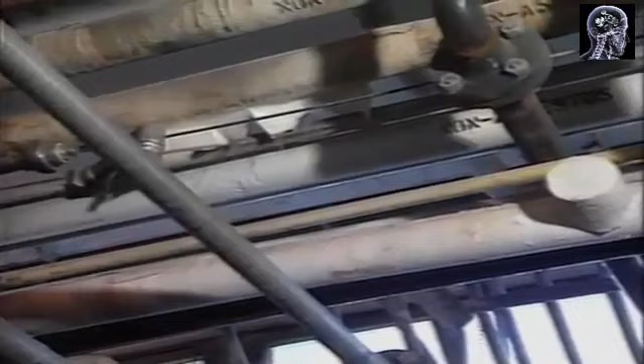Water hammer that results from localized abrupt pressure drops may never be heard, yet water hammer can acquire great force, damaging equipment, ruining product, and potentially putting personnel at risk.

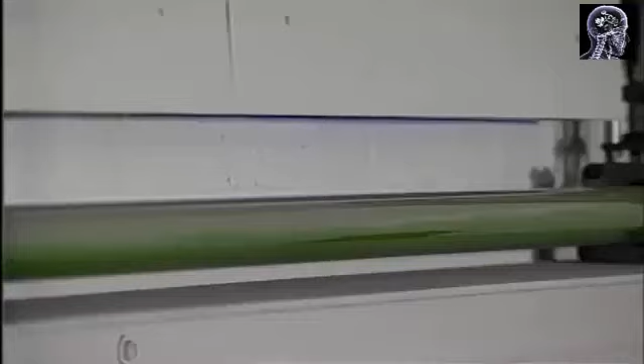Water hammer begins when some force accelerates a column of water along an enclosed path. The incompressible nature of water gives it the power of a steel sledge as it slams into elbows, T's, and valves. The resulting vibrations are transmitted along the water column and piping, damaging fittings and equipment far removed from the problem source.

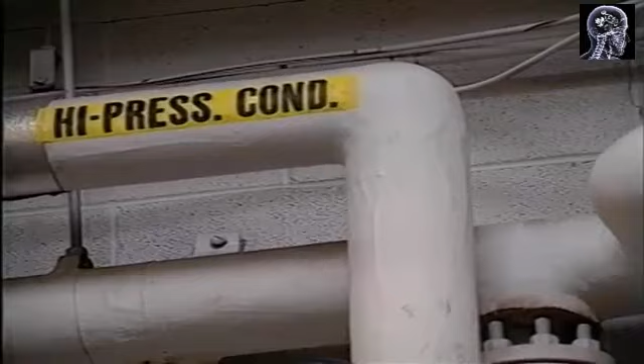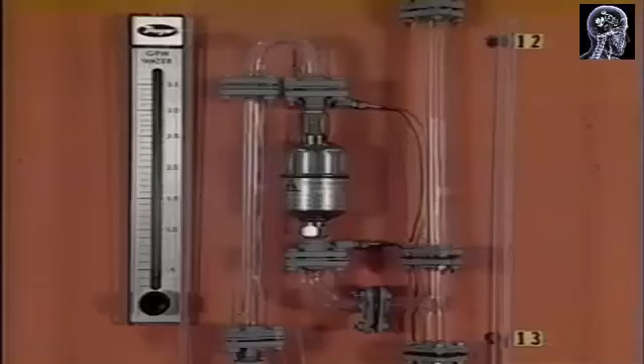Water hammer can occur in any water supply line, hot or cold, and its effects can be even more pronounced in biphase systems. Biphase systems contain both condensate and live or flash steam in the same space. Heat exchangers, tracer lines, steam mains, condensate return lines, and in some cases pump discharge lines may contain a biphase mix. Three distinct conditions have been identified which provide the force that initiates water hammer.

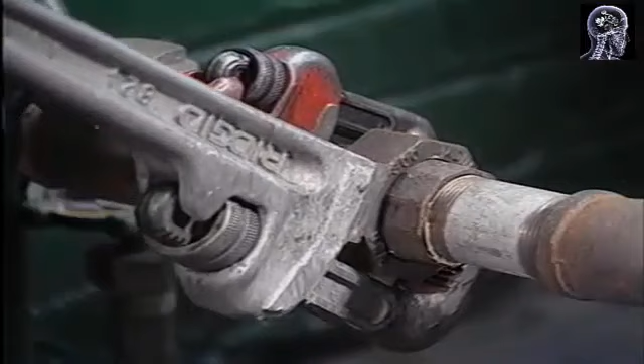These conditions, hydraulic shock, thermal shock, and differential shock, are common to many industrial fluid applications. However, following a few simple guidelines will help you minimize the occurrence of these shocks and diminish the chance of damaging water hammer.

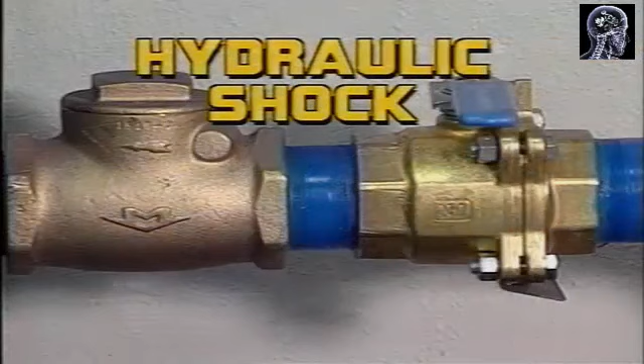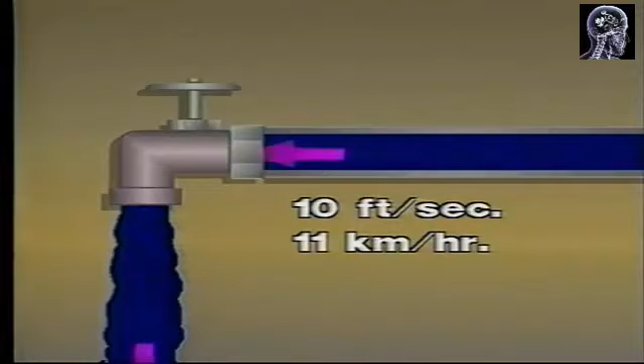Hydraulic shock occurs when a valve is closed too abruptly. When a water valve is open, a solid column of water moves from its source at the main to the valve outlet. This could be 100 pounds of water flowing at 10 feet per second, or about 7 miles per hour. Closing the valve suddenly is like trying to instantly stop a 100-pound hammer.

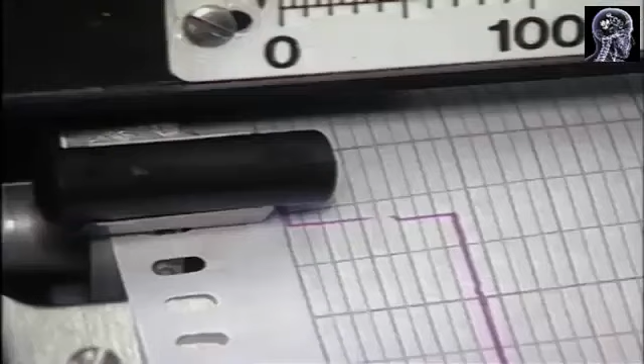A shock wave of about 600 psi slams into the valve and rebounds in all directions, expanding the piping and reflecting back and forth along the length of the system until its momentum is dissipated. By closing the valve slowly, the velocity of the water is reduced before the column is stopped. Since the momentum of the water is decreased gradually, damaging water hammer will not be produced.

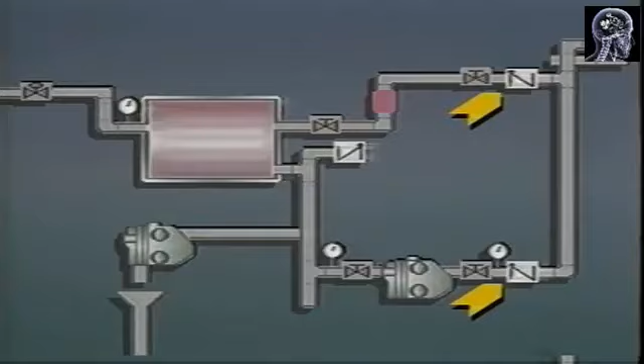Sometimes check valves can produce hydraulic shock. Swing check valves are often used to prevent liquid being drawn into spaces that are subject to intermittent vacuums. They are also applied to prevent backflow from elevated systems when adequate pressure to raise the liquid cannot be guaranteed. In either case, the acceleration of the reversing column of liquid may be quite high. If the swing length of the check valve is sufficient, the column will build enough inertia to cause hydraulic shock in the time it takes the valve to slam shut.

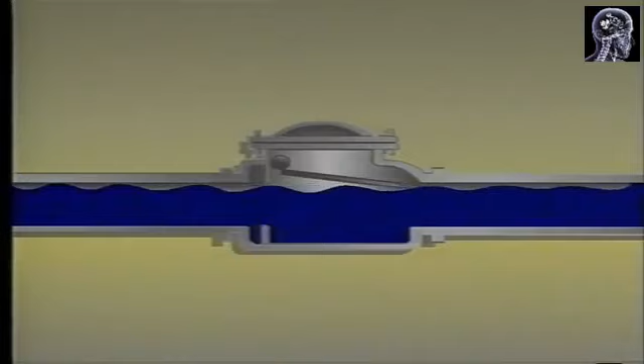Substitute silent or non-slam check valves for swing checks to prevent water hammer in these situations. Silent check valves are center-guided to provide a much shorter stroke than swing checks. These valves also use a spring to help in closing. The result is that silent check valves are closed by the loss of upstream pressure rather than the reversal of flow, preventing hydraulic shock.

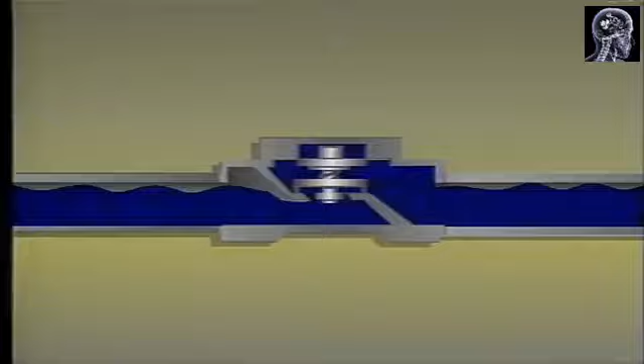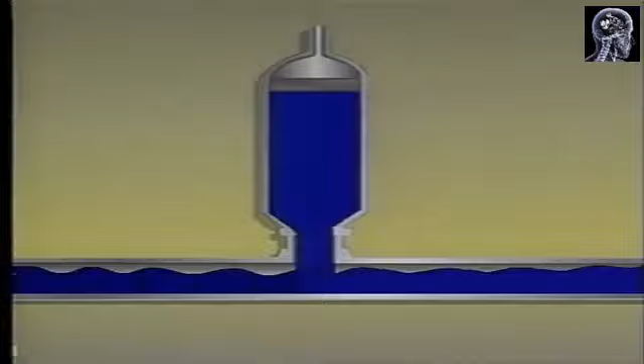Water hammer arresters, if correctly sized, placed, and maintained, will reduce water hammer. When the forward motion of the water column is stopped by the valve, part of the reversing column is forced into the water hammer arrestor. The water chamber of the arrestor expands at a rate controlled by the pressure chamber, gradually slowing the column and preventing hydraulic shock. To prevent water hammer due to hydraulic shock, avoid suddenly stopping water columns.

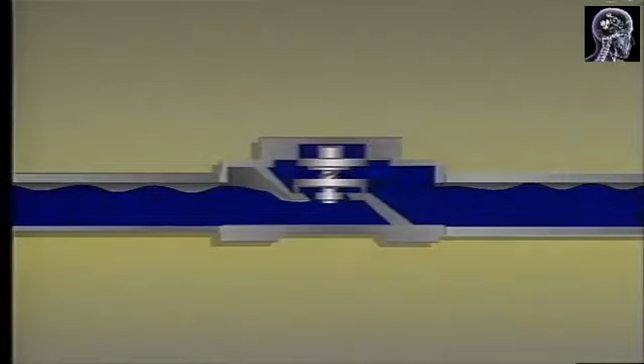Ensure slow closure of valves and install spring-loaded, center-guided, non-slam, or silent check valves that close before flow reversal when appropriate. Use water hammer arresters if necessary, but be sure they are sized and placed correctly and are well maintained.

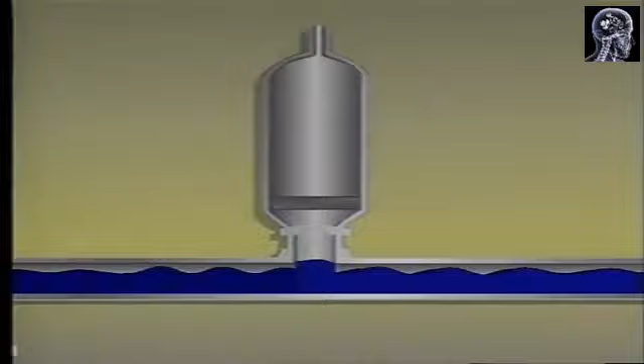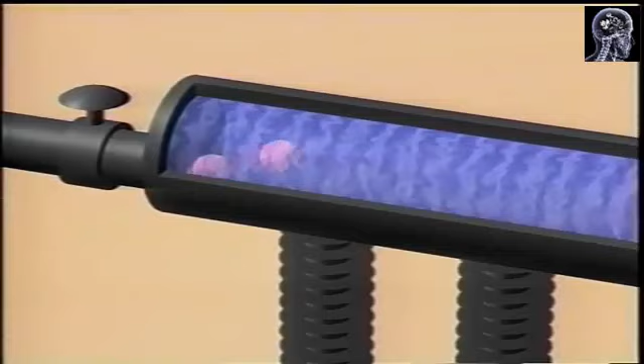Water hammer may also be initiated by thermal shock. In biphase systems, steam bubbles may become trapped in pools of condensate. Since the condensate temperature is usually below saturation, the steam will immediately collapse. Steam occupies hundreds of times the volume of an equal amount of water.

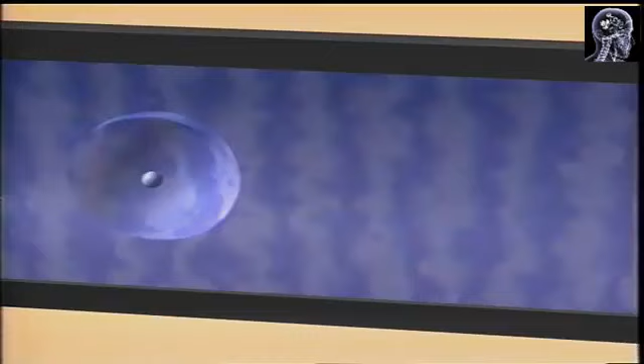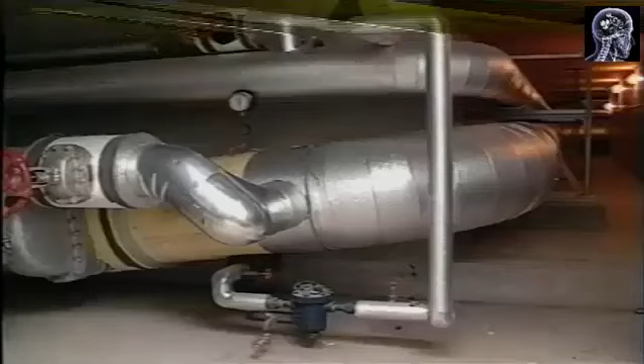When the steam collapses, water is accelerated into the resulting vacuum from all directions. When the void is filled, the water impacts at the center, sending shock waves in all directions. One likely place for thermal shock to occur is in steam utility corridors.

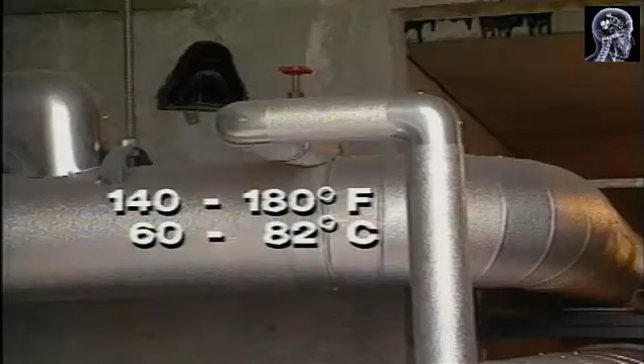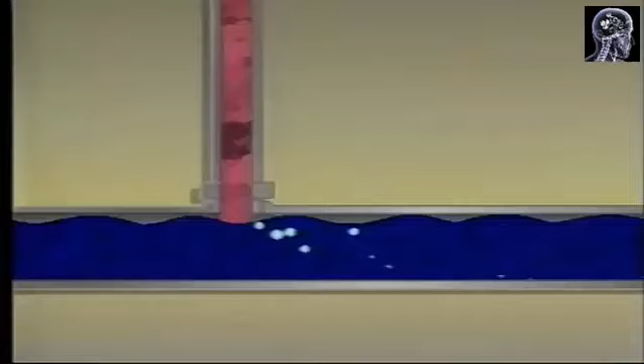In these areas, the drip traps from high-pressure steam mains often discharge directly into the pumped condensate return lines. The temperature of the condensate in these lines usually ranges from 140 to 180 degrees Fahrenheit. The condensate being discharged from the steam trap is at nearly steam temperature when it passes through the trap orifice. When the trap discharge enters the low-pressure condensate line, a great deal of it flashes back into steam.

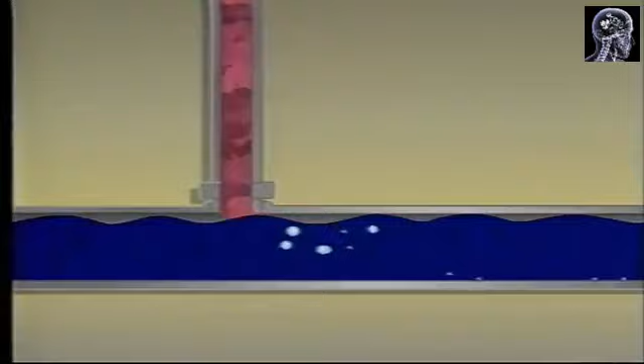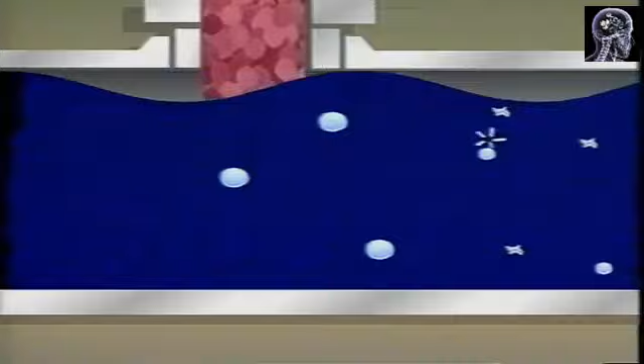The flash steam immediately collapses again when it encounters the relatively cool pump discharge water. This thermal shock often causes damaging water hammer. The localized sudden reduction in pressure near the wall chips away piping and tube interiors. Oxide layers that otherwise would resist further corrosion are removed, resulting in accelerated deterioration of piping and equipment.

To minimize such a disturbance, the drip trap should discharge in the direction of condensate flow by means of a special fitting. This method of controlling thermal shock, called sparging, reduces the concentration of collapsing steam bubbles and keeps the action from occurring by the pipe wall.

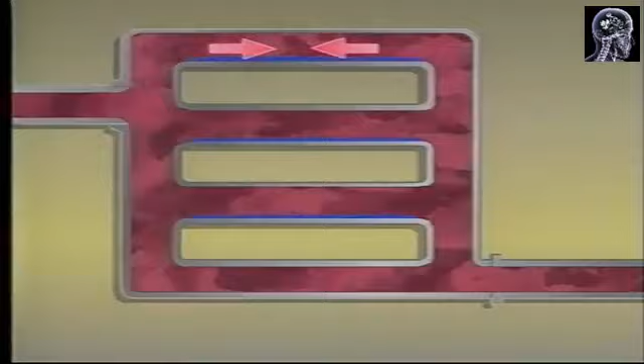Thermal shock can also occur easily in steam coils if they are constructed as shown here. Since the steam is directed toward the center tube first, it can reach the return header before the top and bottom tubes are filled. Consequently, steam feeds the more remote tubes from both ends. With steam flowing into both ends of a tube, waves of condensate flow toward each other. These waves have the potential of trapping pockets of steam between them. If this happens, thermal shock will result when the pocket of steam collapses, and water hammer will probably occur.

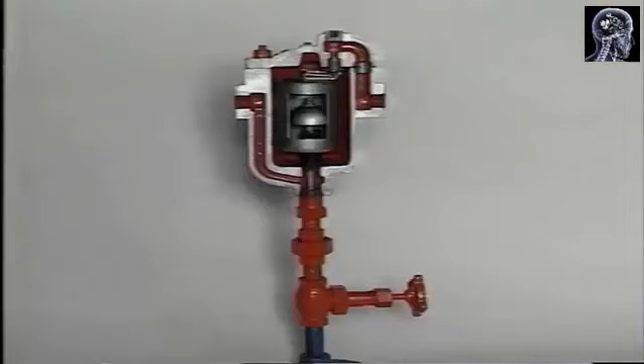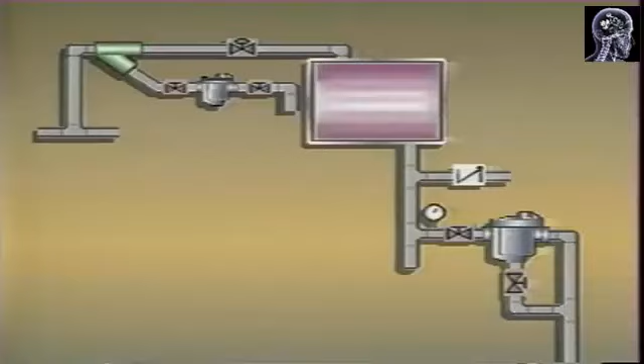Prevent the thermal shock that is generated by such a design by substituting a constant purge device, such as a differential condensate controller, for the steam trap. Condensate controllers maintain a positive differential pressure across the coil at all times. All the tubes will be fed from the supply end only, preventing the entrapment of steam and the resulting thermal shock.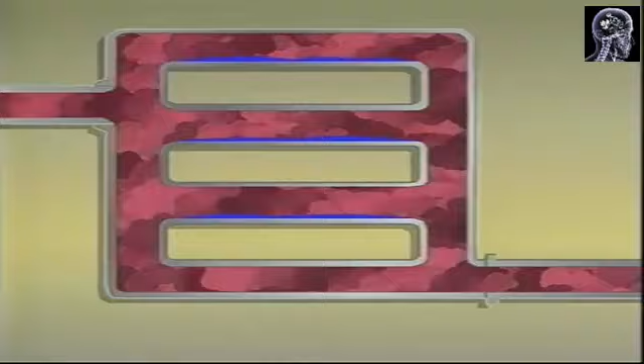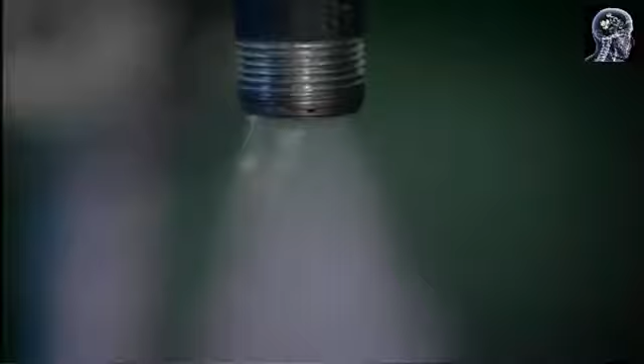Malfunctioning steam traps may also contribute to thermal shock, followed by water hammer. A steam trap that has failed open injects live steam directly into the condensate return line. If this steam is mixed with return line condensate of sufficiently low temperature, it will immediately collapse, and thermal shock will follow. To prevent the occurrence of water hammer due to thermal shock, you must reduce the concentration of collapsing steam bubbles in the condensate.

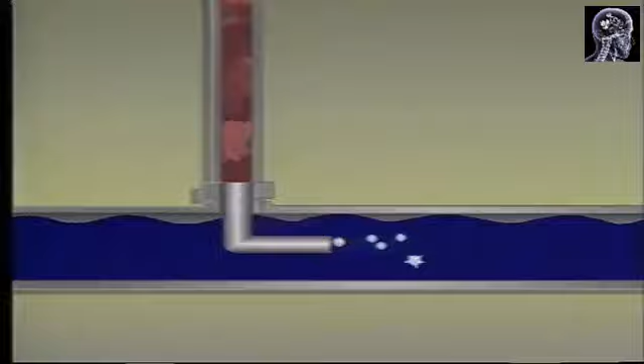If flashing condensate must be discharged into a cool condensate line, it should be discharged in the direction of condensate flow and away from the pipe wall. Precautions must be taken that heat exchanger tubes are always filled from the supply end only.

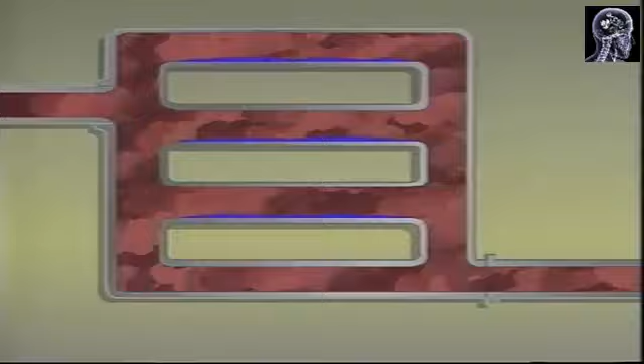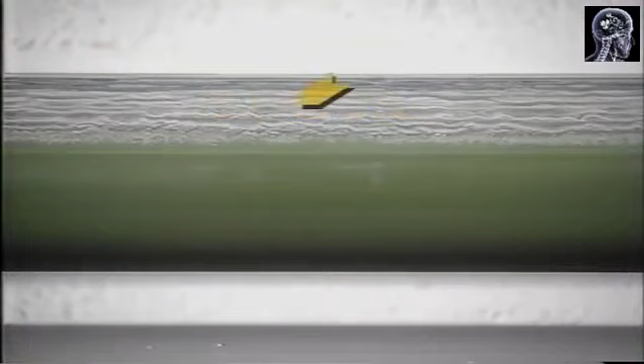Differential shock, like thermal shock, occurs in biphase systems. Differential shock can occur whenever steam and condensate flow in the same line, but at different velocities, such as in high-pressure condensate return lines. In biphase systems, the velocity of the steam is often 10 times the velocity of the liquid. If this gas flow causes condensate waves to rise and fill the pipe, a seal is formed with the pressure of the steam behind it.

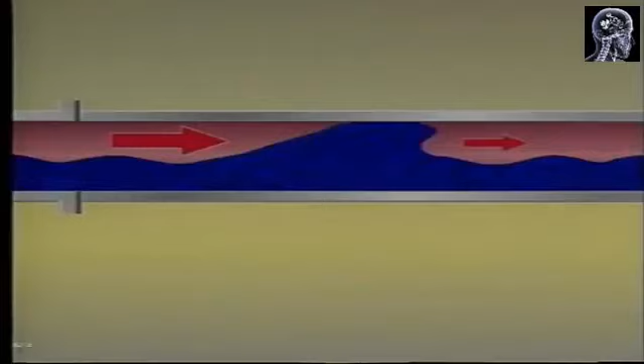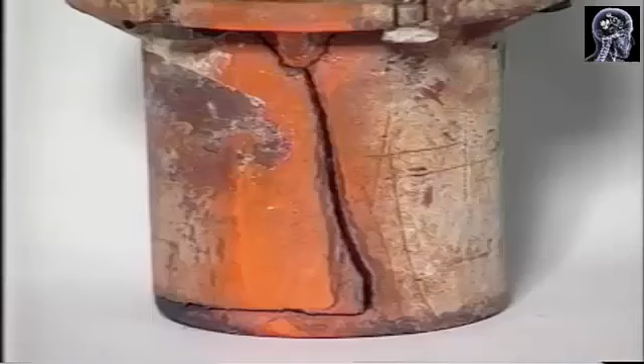Since the steam cannot flow through the condensate seal, pressure drops on the downstream side. The condensate seal now becomes a piston that is accelerated downstream by virtue of this pressure differential. As it is driven downstream, the piston picks up more liquid that is added to the existing mass of the slug and velocity increases. This is differential shock. If the slug gains high enough momentum and is then required to change direction at a T or elbow, or is stopped by a valve, great damage can be done.

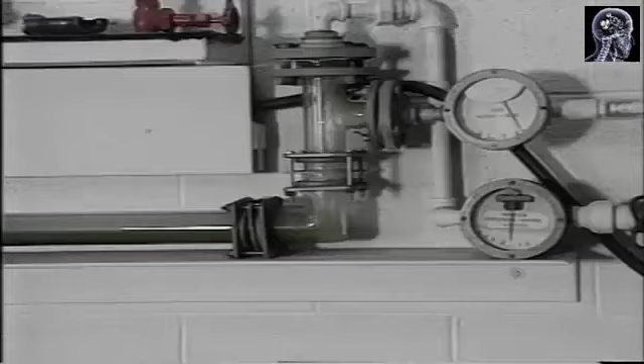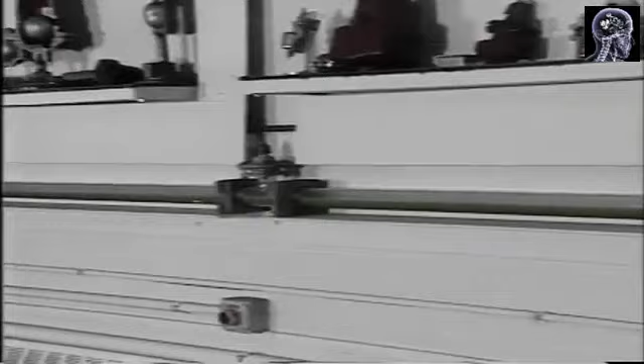In the demo lab at Armstrong International, we have assembled a fixture to illustrate the problem. We use this 20-foot, 2-inch diameter glass pipe to act as a condensate return line. The pipe is pitched 1/4 inch in 10 feet to provide gravity flow. Flowing through the pipe, we have cold water. In addition to water, we can also have compressed air flowing in the system to simulate flash steam flowing across the top of the condensate by virtue of differential pressure.

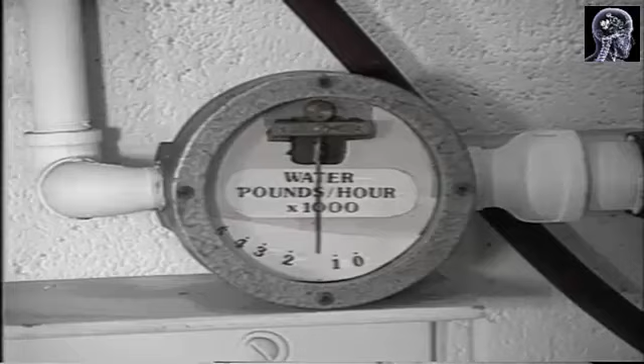One flow meter constantly measures the flow rate of the water. Another flow meter continuously monitors the flow rate of the compressed air. As you can see, we now have 1,500 pounds per hour of water flowing in our glass pipe, and no compressed air.

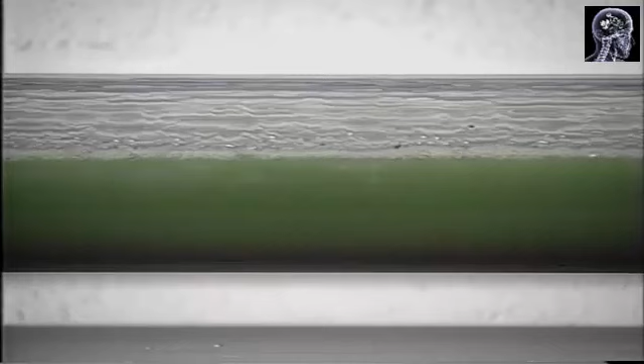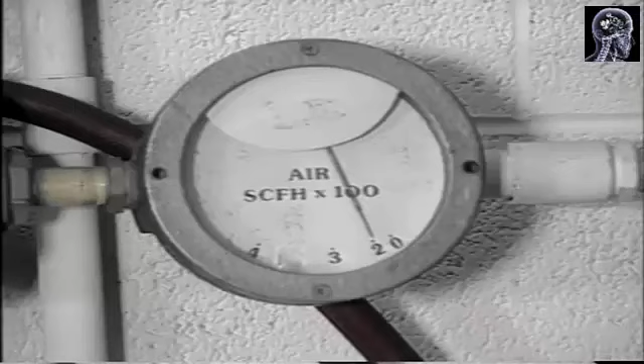Under this condition, our pipe is approximately half filled with water. As we increase the flow rate of water in our pipe to 2,000 pounds per hour, the depth of the water increases to 5/8. We now introduce compressed air into the system to simulate flash steam, with a flow rate of about 200 standard cubic feet per hour, and the depth of the water recedes.

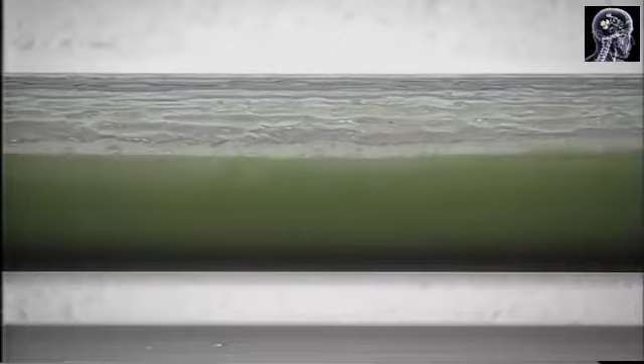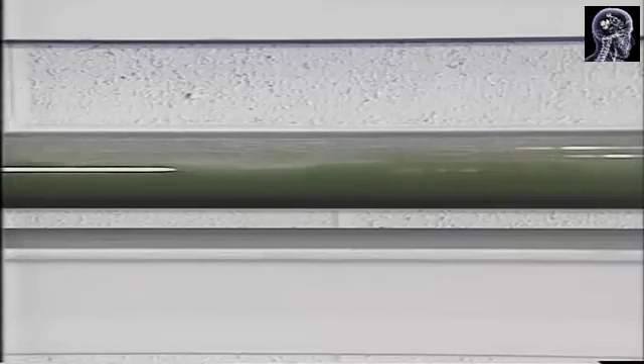We are increasing the speed of the water flowing through the pipe by virtue of the velocity of the gas flowing across its surface. Observe now as the compressed airflow increases. The waves formed on the surface of the condensate become higher. Further increasing the airflow causes the waves to block off more of the cross-section of the piping until a seal is formed, completely closing off the pipe.

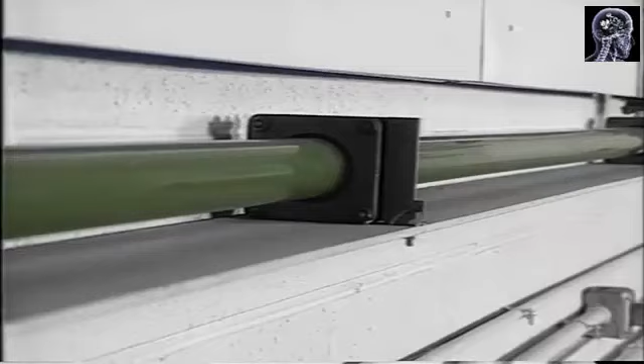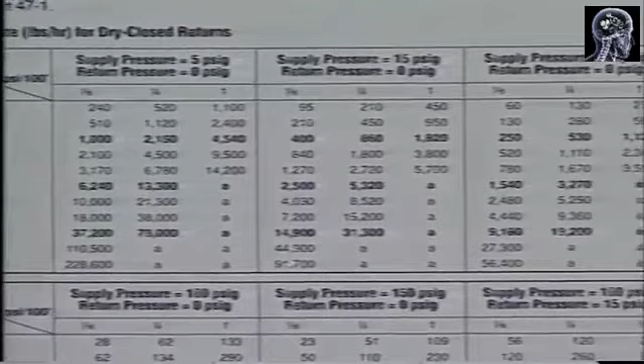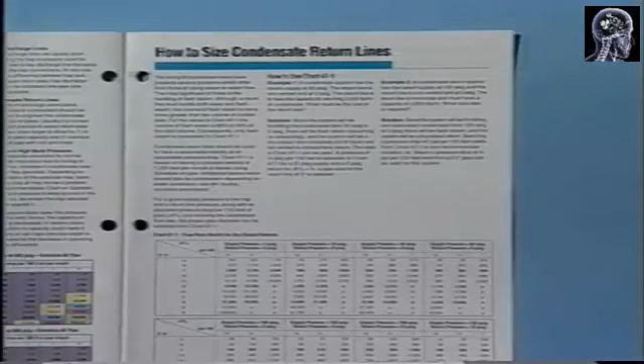A slug of condensate is accelerated downstream by the pressure differential, becoming a piston that gains in mass and velocity as it travels. The proper sizing and pitching of condensate lines are the only means of guarding against this type of problem. The Armstrong Steam Conservation Handbook includes a chart that helps you in deciding the correct condensate return line size for your particular application.

Differential shock can also become a problem when elevated heat exchange equipment is drained with a substantial vertical drop ahead of the trap. Under normal conditions, condensate drains down the walls of the pipe. A sufficient volume of steam constantly flows down the center of the pipe to replace the steam that is condensed by radiation losses of the piping and the trap body itself. The steam flow rate increases if a thermostatic element such as the bellows or wafer in an F&T trap opens.

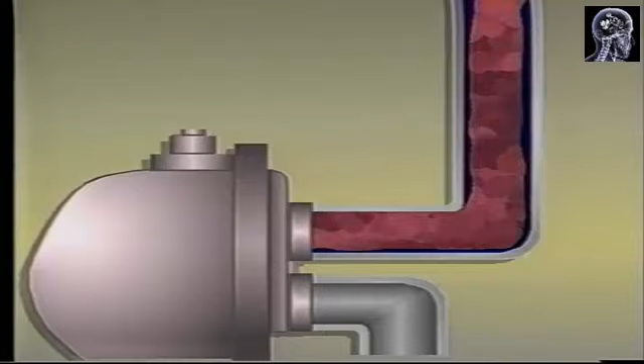If a slug of condensate seals off the pipe, steam collapses downstream of the seal. Again, a pressure differential forms, and this, along with gravity, accelerates the slug. When this piston strikes the trap, it can damage a float, the thermostatic element, or other parts of its mechanisms. To avoid differential shock arising from this situation, use an F&T trap and backvent it to the top of the vertical line to maintain near equal pressure throughout the riser, even if a slug of condensate forms.

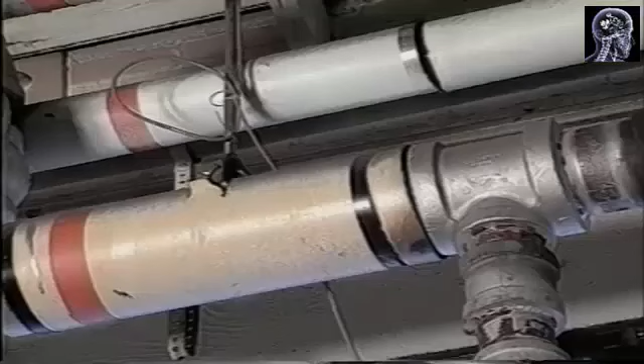In both of the two previous cases, the condensing of steam downstream of the seal produced the acceleration. It follows that the likelihood of differential shock arising and causing water hammer is greater in uninsulated pipes, especially on outdoor systems, than in insulated pipes. Long runs of any kind between the heat exchange equipment and the trap can produce this situation and should be avoided.

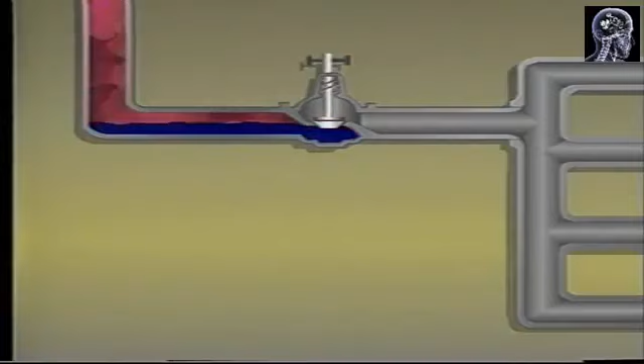Damaging water hammer may also occur due to differential shock whenever there is an improperly dripped pocket ahead of a control valve. Condensate builds up in front of the valve while it is closed. When the valve is opened, the slug of condensate is driven through the valve and into the piping and equipment by the live steam. The placement of a separator and a drip trap immediately upstream of the control valve will prevent this rampaging slug.

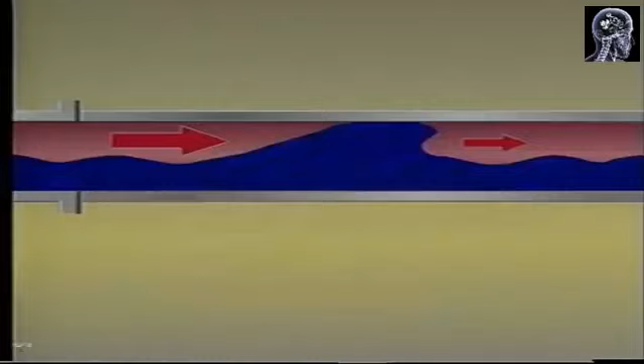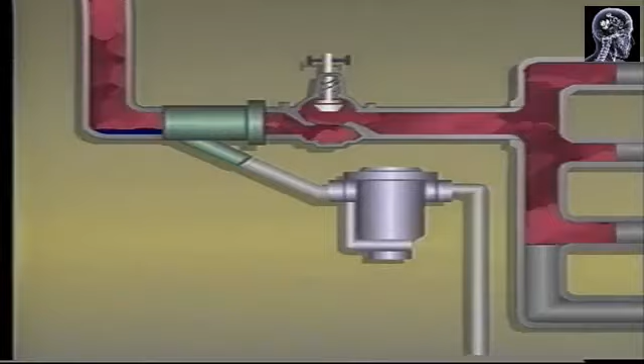To control differential shock, you must prevent condensate seals from forming in biphase systems. Condensate lines must be sized correctly, and long vertical drops to the traps must be backvented. The length of the lines to traps should be minimized, and the lines may have to be insulated to reduce condensing. The installation of a proper drip leg ahead of control valves will prevent differential shock from occurring when the control valve is opened after a period of closure. Careful attention to these few guidelines will prevent most water hammer.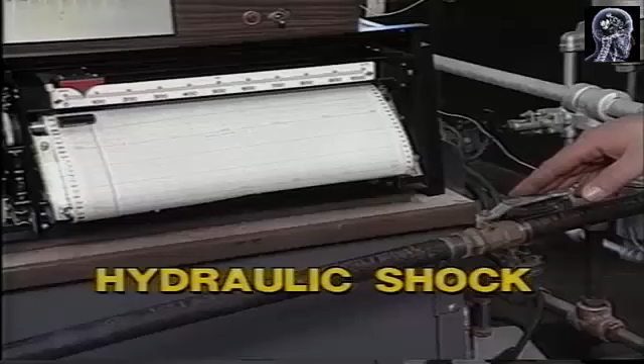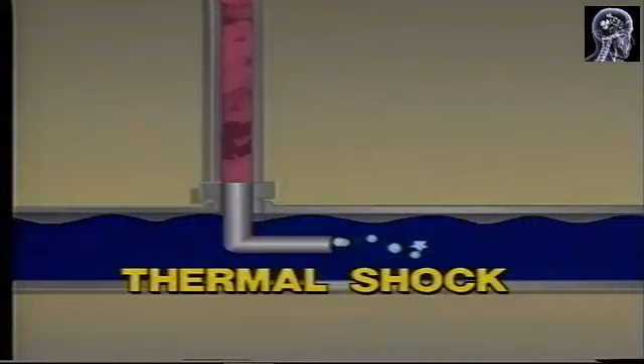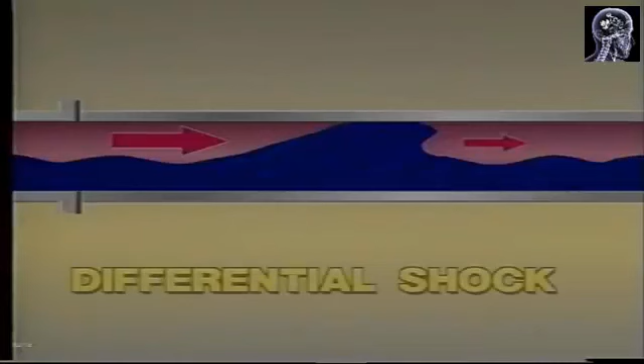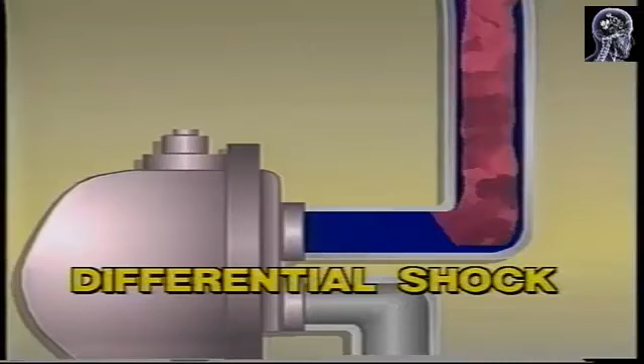Prevent the sudden stopping of water in pipelines by closing manual valves slowly and by installing spring-loaded, center-guided silent check valves where appropriate. Prevent thermal shock by using a sparging tube wherever flash steam is discharged into condensate at a lower temperature, and by ensuring that heat exchanger tubes are filled from one end. Prevent differential shock in biphase systems by providing return lines that are properly pitched and of adequate size. Avoid draining equipment with long lines to the trap and insulate condensate lines whenever necessary.

Following these guidelines for the proper design and operation of your system will minimize the likelihood of the shocks that cause water hammer. This, in turn, will greatly reduce the likelihood of damage to your system, to your product, and to your personnel.